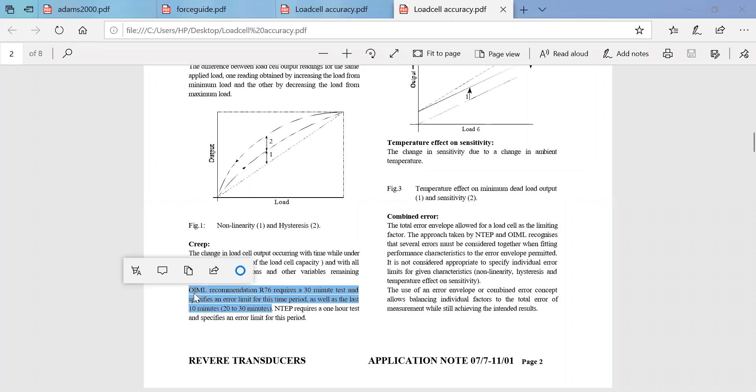So this is the difference between OIML and the NTEP standards. So it's always better to go with the OIML recommendation than that of NTEP. OIML is universally decided across many countries, but this was decided only with respect to the United States.

So after that, they also speak about minimum dead load output return, which is in short called MDLOR. So what does this minimum dead load output return speak about? It provides the difference in the load cell output at the minimum dead load measured before and after a 30-minute load application. So in our practical, what we used to do, we used to apply the load and take the reading. We never used to wait until 30 minutes.

Okay, so we have just done a very minimum part in the load cell experiment, but in actual, if you want to know in depth, you should try to study each device, how it is being used in industries or organizations. Then it will really help you to understand how good the field of measurement is, how good the field of metrology is, and how it is helpful in many industries. It's not only in mechanical. It is a very beautiful subject.

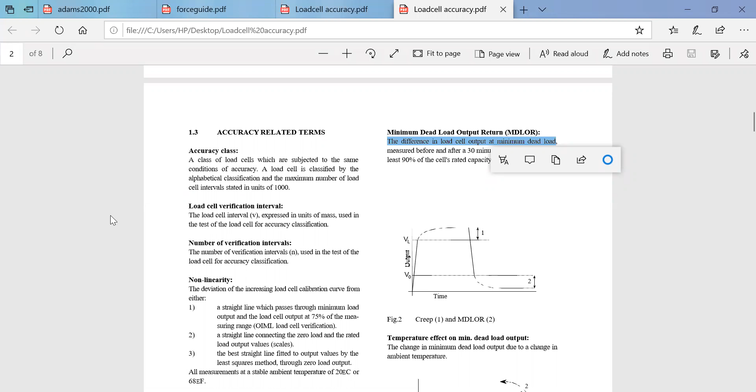If you go digging into the research behind each instrument, device and utilization, you will get very in-depth knowledge related to each module. You will really have good examples to explain in reality how every load cell or any other measuring device works exactly. So I focused in the last class on strain gauge, and now I'm covering the load cell. Let me see if in the next class, if time permits, we'll do it for the rest.

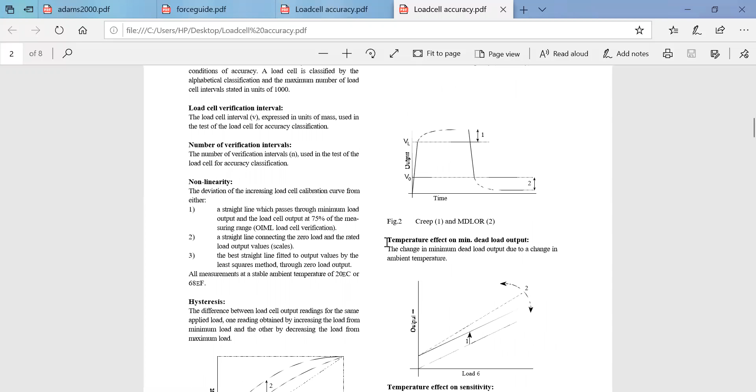And the next term you should understand is the temperature effect on minimum dead load output. So how does temperature affect minimum dead load output? When you apply the load at a specific room temperature, it will show you some reading, and when you keep that load for a certain period of time, the effect of the temperature will come out across the 30 minutes dwell time. That difference will provide you the deviation due to the temperature effect on our minimum dead load output return. As per that, you can draw a graph and show.

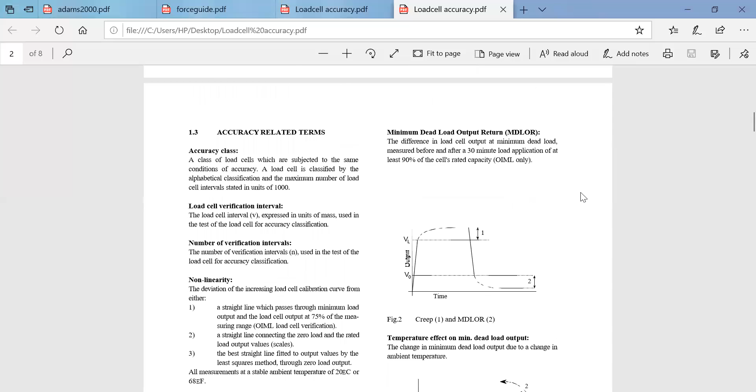This will help you to show how sensitive the given load cell is to our external environment. You cannot understand this only by putting on the load and getting the reading. It will not provide you any sensitivity of how it is affected by temperature. If you want to analyze this, you should always keep a dwell time and check the reading for 30 minutes, how it is varying, and from that you can figure out how sensitive your readings are to changes in the external environment, temperature or whatever. So this is the importance of temperature effect on minimum dead load output return. That's what I wanted to tell.

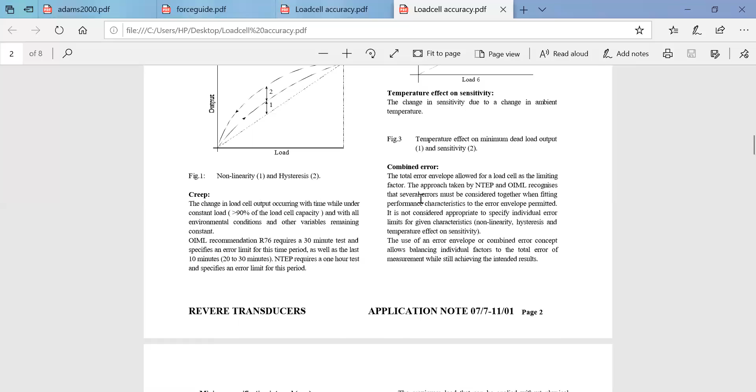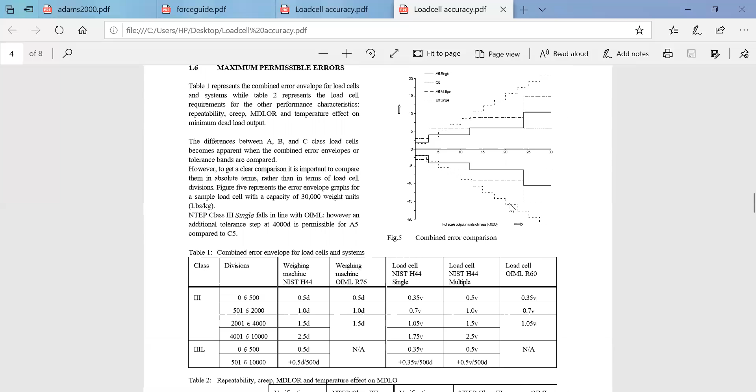And later they have also discussed the combined error envelope. So this was with respect to OIML specifically and NTEP specifically. Later they made an approach for identifying errors with a combined approach of NTEP and OIML. This I will explain in the next class. I don't want to hurry. There is a beautiful description of how you will classify the load cells. Everything is beautifully explained with numerical values also. This I will explain in tomorrow's class.

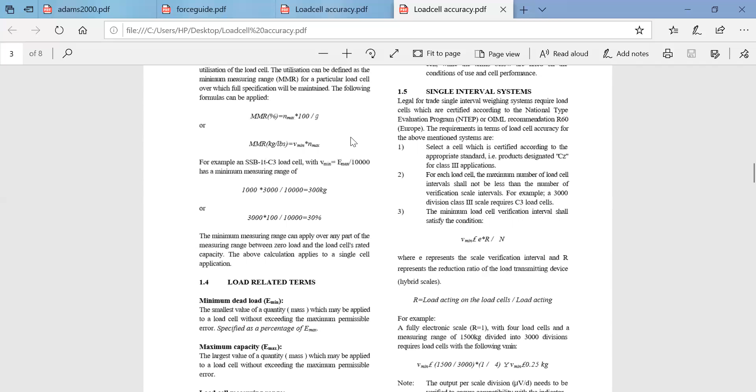And are you people taking the test, Tarun? Hello? Yes, ma'am. Yeah, you are taking the test, right? Yes, ma'am. I will. Okay, no problem. Just speak with your other friends also and let me know the final number. Okay? Okay, ma'am. Take care, everyone. Have a nice day. Prepare well for your internals.

Jayant, how are you? Ma'am, I'm fine, how are you? Fine, ma'am, thank you. Last class, you were not there. Why? Bunking the classes? Ma'am, I was there. Okay, I could not see, I hope. I don't know, ma'am, because one class I was absent. I don't remember when. Okay, not a problem. You will always be there, right? In one class I could not see your name, so I just asked you. Yes, ma'am. Okay, then both of you take care. Have a nice day. Thank you, ma'am. Same. Bye bye.